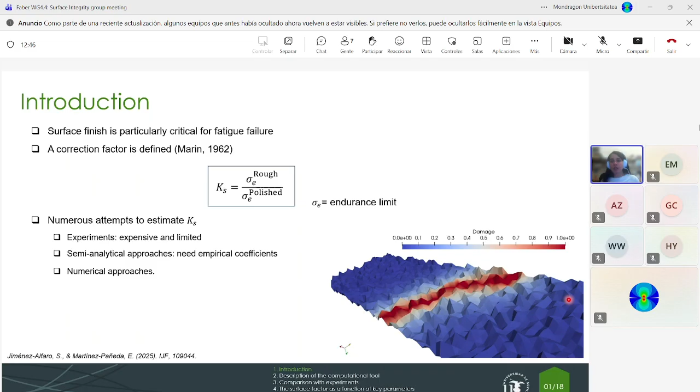So in this context, we propose to develop a numerical framework that is able to describe the effect of surface roughness, especially in the high cycle fatigue regime. And this numerical tool is a combination of two different techniques. One is the phase field model for fatigue fracture, and the other one is a stochastic tool to build a roughness resolving mesh. So in the end, what we want to answer is the question how much fatigue life is reduced for a given surface roughness and material properties. And this is the work that we have recently published in International Journal of Fatigue.

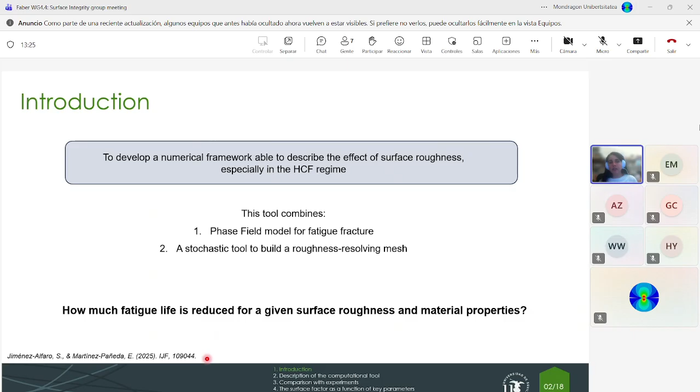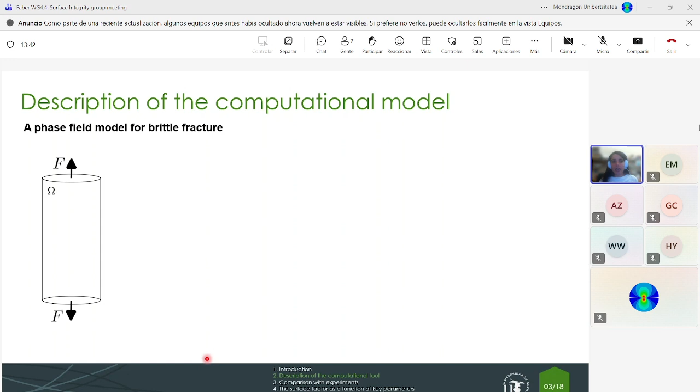So before going into details about the results and also how to build a rough mesh, I would like to explain some details about the phase field model. And for that, imagine we have a bar in tension. At a certain moment, the load is so high that then a crack appears. And this crack can be considered a discontinuity in the material. So the basic idea of phase field is to substitute this discontinuity using a phase field variable that goes from 0 to 1. So we change this discontinuity to a smooth transition. When we have a phase field equal to 0, then the material point is not damaged. And when we have a phase field equal to 1, then the material point is completely damaged. So this is how we change a discontinuity by a smooth transition.

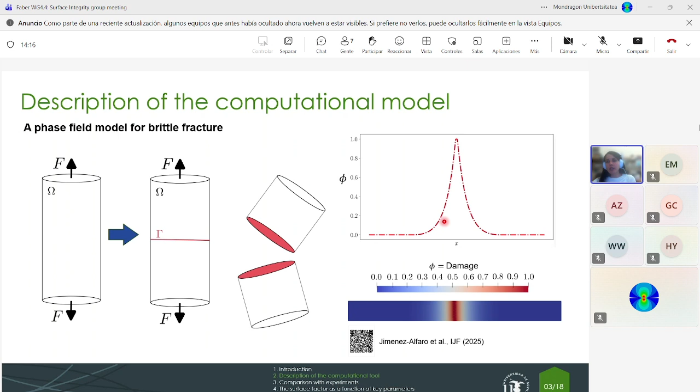We include this variable in the energetic functional of the solid that is defined as the sum of two terms. One is the internal energy and the other one the external work. This energetic functional and the solution, the phase field variable and the displacement field, need to fulfill three conditions. First of all, the irreversibility. So the damage cannot come back, basically. The damage variable needs to grow in all the situations. Second one, the stability condition. That means that at each time, the energy needs to be as minimum as possible. And third, the law of conservation of energy. If we join together these three conditions, then we get the solution.

The internal energy can also be defined as the sum of different terms. The first one is the elastic internal energy density, that you can see is split into two additional terms. This is to consider the fact that only tensile strains promote failure, not negative compression strains. And this is the reason why we have a degradation function only multiplying the positive split term of the energy.

And then we have the fracture energy density. So the idea of fracture energy density was introduced by Griffith. It was GC, a material parameter that is the critical energy release rate, multiplied by the crack surface. Here we have a crack surface that is regularized. It is a region where there is a smooth transition. So this surface is defined using the phase field variable, as you can see here.

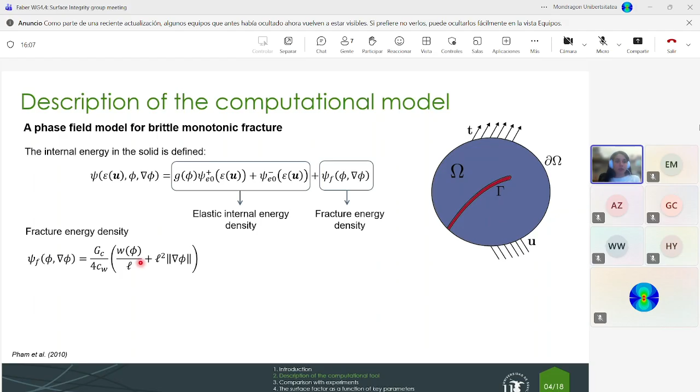We can find different proposals for the definition of these functions. The most famous ones are the AT1 and the AT2. So in the AT1 model, we consider an elastic threshold before the damage, and in the AT2 model, we consider the damage starts from the beginning. So in the community, we use one or the other one, depending on the approach that gives better results.

When we go to fatigue, we need to include in this fracture energy density another additional parameter in the energy of the solid, that is the degradation over cycles. It is a fatigue degradation function that reduces the critical energy release rate over the cycles, from one cycle to the other. Again, we have different approaches, and we have used the one proposed by Golahmar et al. in International Journal of Fatigue in 2023.

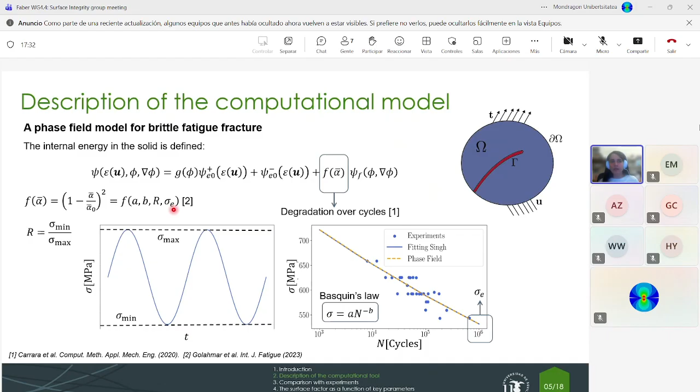You can see that this function depends on different parameters, and they are basically the parameters of the Basquin law, the stress ratio, that is the ratio between the minimum stress and the maximum stress in the cycle, and also this endurance limit. This endurance limit can be in the model just to say to the phase field variable, do not grow if we have a stress level that is lower than the endurance limit, just to consider this infinite life, or we can just omit it and not consider that we have this infinite life, such as other materials. So now we had two different techniques.

One was the phase field, and the other one was a tool that is used to define a rough mesh. So this tool is inspired by a proposal made by Loth et al. in 2023. This proposal was for optics, because in optics they are interested in the fact that when the light impinges a surface, then it is deviated if we have a certain surface roughness. So they need to model all of this.

And basically, the main idea behind this is that we deviate different points in a nominal surface, meaning the same surface without the surface roughness, following a mathematical function that is here. You can see that it is the product of the root mean square surface roughness, the matrix L, that is the Cholesky decomposition of the autocorrelation matrix, and then the Gaussian white noise. This Gaussian white noise is the one responsible for the stochastic phenomenon.

So if we introduce one Gaussian white noise, then we have a certain profile. And if we introduce another one, the surface profile is completely different, considering the same parameters, the same root mean square surface roughness and the same correlation length. About the correlation length, it is an additional parameter that is here in the definition of the autocorrelation matrix. This parameter is quite interesting because it defines how the different peaks are related in the horizontal direction.

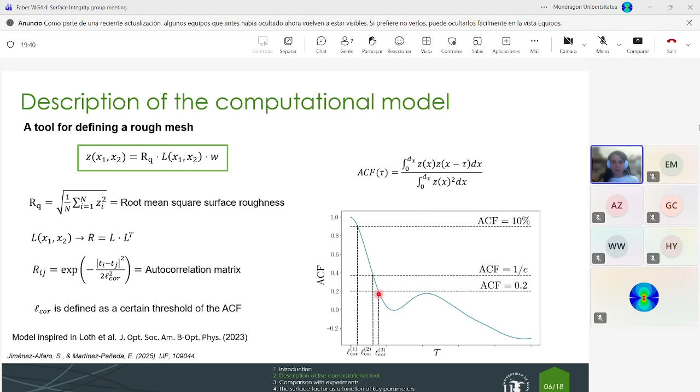Then here you have how the computational framework looks. We start by building the nominal surface, meaning we don't consider any surface roughness at this moment. Then we consider a certain combination of parameters, average surface roughness and correlation length, or root mean square surface roughness and correlation length, and we obtain the autocorrelation matrix. Then we start an iterative process.

So for a certain Gaussian white noise variable, we obtain the distribution of the height of the peaks, and then we build the mesh, assuming that we have a rough specimen. So we just introduce this height deviation in the nominal surface. And then we use the phase field model to determine the number of cycles to failure. We iterate this procedure until we fulfill two different conditions.

The first one is that we have at least a sample size of 30. This is because a minimum sample size of 30 gives us a Gaussian distribution. And the second condition is that the relative margin of error is less than 5%. So if we fulfill these two conditions, then we are finished, and the number of cycles to failure is the mean of the distribution that we have.

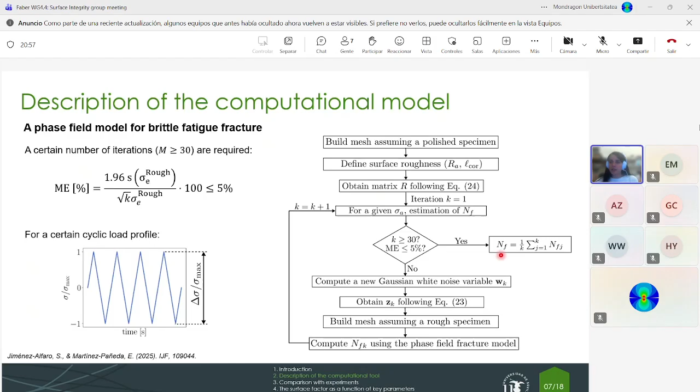So now we compare our results to experimental data. We have used an experimental campaign done by Singh et al. in 2019. It was done on a material that was AISI 4130. You can see here in this table the material properties reported. And it was a really interesting experimental campaign because it gives us all the data we need. So they analyzed, first of all, the polished specimen without any roughness, and then they included two different values of the average surface roughness, and they studied the effect that it has on fatigue.

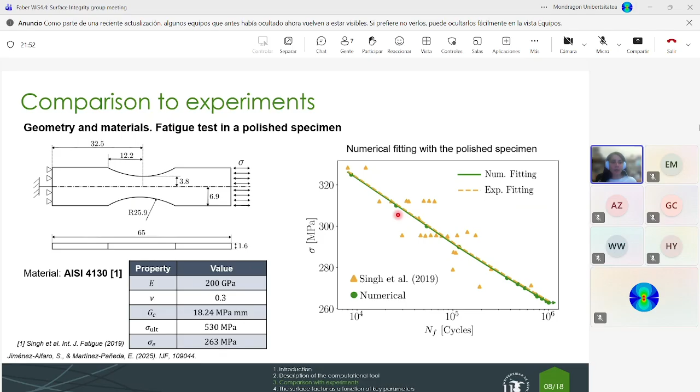So we start with the polished specimen, and we feed our phase field model the different parameters that we have in our numerical framework, using just polished specimens. We ensure that our numerical SN curve fits the experimental one. And now we apply the surface roughness. So for that, we have defined the surface factor as a function of different values of the average surface roughness.

At this moment, we consider that we don't know the correlation length. We just consider a huge range, a range determined in the literature, as you can see, between 10 and 100 micrometers. This is because we have found that a priori in the literature, we don't easily find this correlation length. So it is just to see how the computational framework can predict data if we don't have this value.

And then, as you can see, for the two experimental campaigns we have used, the one by Singh et al. that I've mentioned before, and the one by Johnson in 1973, that is one of the most famous ones for this problem, you can see that the experimental data always fit inside the ranges that we predict numerically.

At this point, I would like to highlight something, that is that at the beginning I was mentioning the root mean square surface roughness, and now I'm talking about the average surface roughness. This is because here we can work with both parameters, since we are working with a Gaussian distribution, so both are related by this relation.

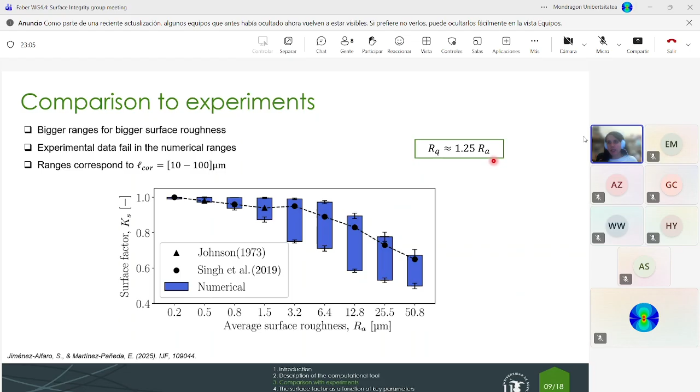So our numerical tool can be more accurate if we know the correlation length, and this is what we have done here, because in the experimental campaign done in 2019, we have also the surface profile, as you can see here. So we have used this surface profile to build the ACF, the autocorrelation function, and then we have determined using the three criteria the values of the correlation length. So you can see here the results.

This is the surface factor obtained numerically, and this is the surface factor obtained experimentally. So as you can see, the one that gives best result is the ACF equal to 0.2, that the error between the experimental results and the numerical results is less than 1%. This is very interesting because this criterion, ACF equal to 0.2, is the criterion used and proposed by the regulation. So it is also the one that gives the best results for us in our computational framework.

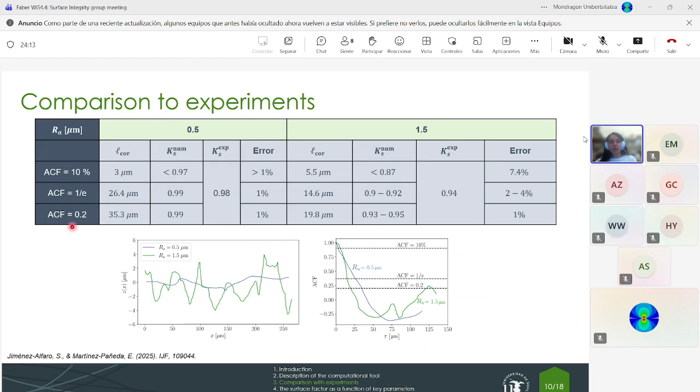So each time we are changing a parameter in our tool, what we are doing in the end is that we are changing the rough profile. It means that we are changing the mesh. So here you have some examples. For example, this critical case where we have a very big value of the average surface roughness and a very low value of the correlation length. You can see the extreme peaks.

Then you can see another extreme case on the other side. That is when we have a low value of the average surface roughness and a big value of the correlation length. And you can see that we can even not notice the peaks. So we need to put a rule for meshing all of these cases, especially because we have a stochastic framework. So in the end, we need to mesh several times in order to get the sample.

So this tool is based on the data that we have found in the literature. In the tool proposed by Love et al., they recommended that 5 elements define the correlation length. And in the phase field, it is typically determined that 5 elements define the phase field length scale. So we have just used this compromise relation to determine that in our tool, 5 elements define the minimum, either the correlation length or the phase field length scale.

If we change these parameters and we change the mesh, what we see is that the number of elements also change, and it can increase the computational complexity of the problem. So you can see that when the correlation length is really small, then we can have up to 100,000 elements. So it can be a really huge mesh.

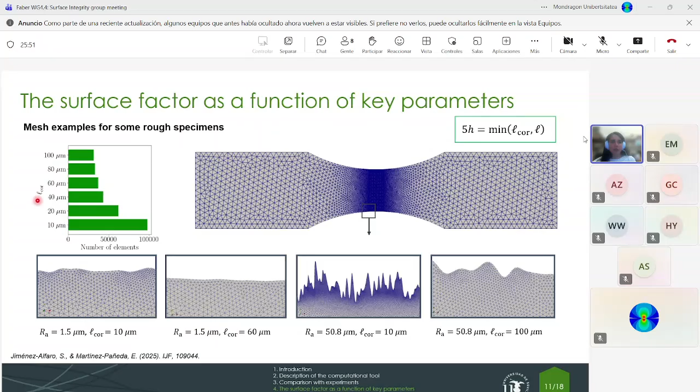So now we would like to make a parametric analysis where we express the surface factor as a function of key parameters. And for that, we have selected an important range that is the one that we are going to follow in the whole analysis. So we started by the range selected by Johnson in 1973, that, as I've said, I think it is one of the most important experimental campaigns in this topic.

And then we have reduced this range in the lowest side, because for average surface roughness lower than 0.2 micrometers, according to the ASTM regulations, the effect in fatigue is negligible. So we have just checked that this is fulfilled for 0.2, and we have not analyzed the other cases. We have also changed two values, these two ones, to include the fact that in the experimental campaign by Singh et al., the average surface roughness was 0.5 and 1.5 micrometers. So we have just changed these two ones.

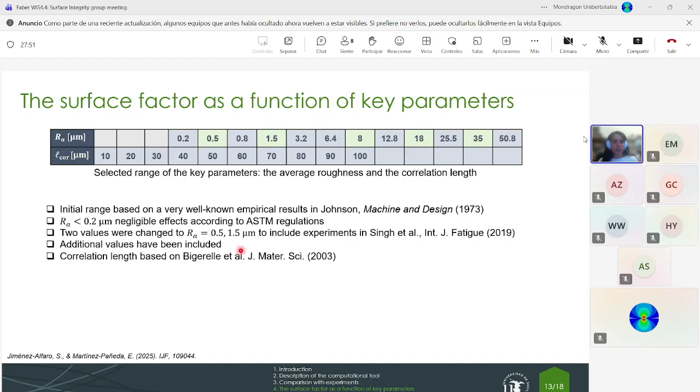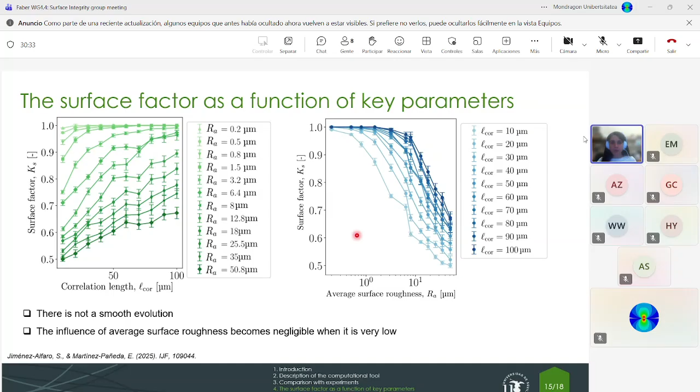We have also analyzed the influence of another parameter, that is the fracture strength. And here I need to make an important comment: for the fracture mechanics community, especially for the ones working in brittle fracture, the fracture strength is the most important parameter. And since the phase field model was created in this brittle environment, we use the fracture strength as an input. But when we go for metals, the fracture strength is not very well determined. We don't measure the stress level at which we have fracture. We normally measure the tensile strength, the ultimate strength, that is the maximum stress level that we can get in the tensile test.

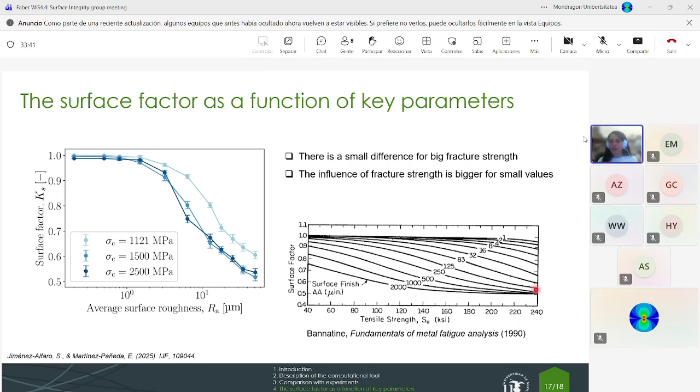So now just to conclude, we have developed a new computational framework that is able to predict the fatigue life of rough components. We have observed a good agreement with experimental data that we have found in the literature. The model is able to create surface versus fatigue maps, so we can use it as a design tool. And we have incorporated the stochastic nature of surface roughness by considering the relative margin of error, a sample size,

etc. And we don't include it here, but if you have a look at the paper, you can see that we have used our tool to give estimations for additive manufacturing and also pitting corrosion, and we have checked that it fits the experimental data that we have found in the literature. In fact, for the pitting corrosion, I have a former student that finished his master thesis, and we have applied our numerical tool to study different corrosion profiles, and we have determined the fatigue life of these profiles. So we have checked that it works in the end.